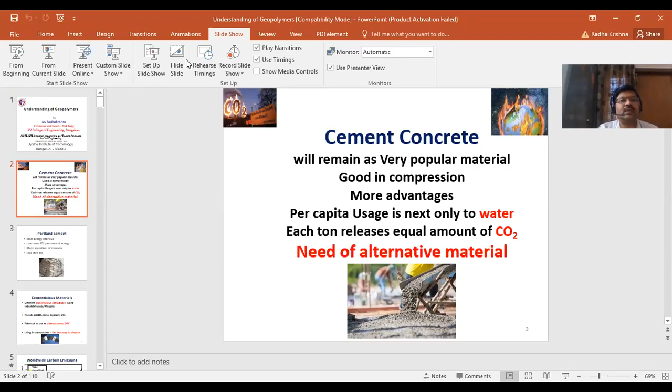I could not hear. Hello? Hello? Hello, Keshava? Can you hear me? Others, please. Hello? Yes sir, yes sir. Just a minute sir, yes sir, just a minute, okay, okay.

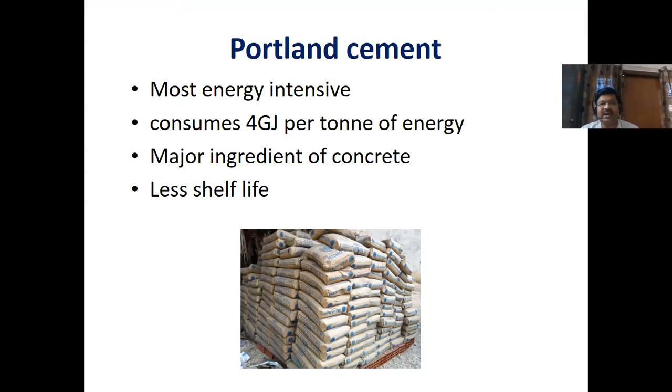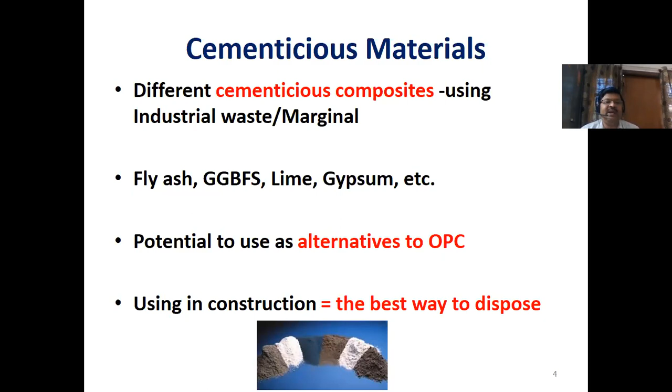Cement is a major ingredient of making concrete, and its shelf life is limited. There are other cementitious materials which may be industrial waste or marginal materials, such as fly ash, GGBS, lime, gypsum, etc. All these materials have the potential to serve as alternatives to ordinary Portland cement. So instead of disposing them in open land, using them in construction is the best way to dispose and utilize them.

Now let us go back to carbon credits. The graph shows data from 1750 to 2005 - recent statistics I don't have, sorry for that. This shows carbon emission for gaseous fuels, this is by solid fuels, and this is by liquid fuel. If you see this, after 1950 there is a huge jump in the consumption or carbon liberation in the world. Of course, if you put it all together, this is the total.

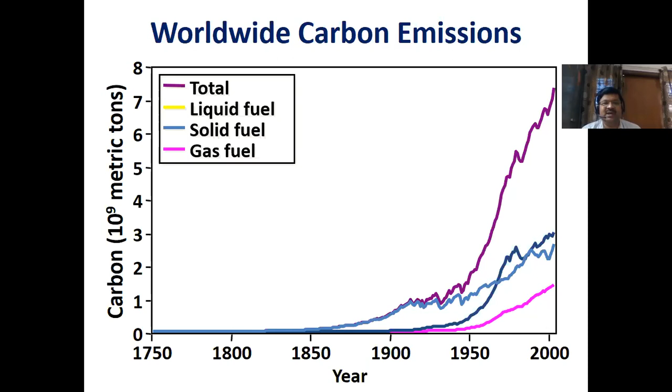So talks are going on among the leaders of this world to reduce carbon emission at least to the level of 1990. Our Prime Minister also has signed for this. So the responsibility lies on us and the future generation to reduce carbon emission.

So how is it possible? It is possible by conserving energy, by reducing energy needs, recycling energy, and we can go for alternate energy sources like nuclear, wind, geothermal, hydroelectric, solar, and fusion. All these things will not have any carbon emission. Wherever it is possible, let us make use of all these things so that we can reduce the carbon emission.

Now the next question is how it is possible in the construction industry. So it is possible only by reducing OPC.

If you think of OPC - on the y-axis is the replacement level of fly ash, I will tell you what fly ash is later. On the x-axis, OPC itself is there, blended cement is there, high volume fly ash concrete is there, FaL-G and geopolymer. OPC cannot have any fly ash, so it will be 0. Blended cement may have around 30, maybe these figures are approximate. And in case of high volume fly ash concrete, we can go up to 55, even 60.

This was developed by CANMET, Indian origin scientists at CANMET Canada. They developed a new concrete called high volume fly ash concrete in the 1980s, wherein a minimum of 50% of cement can be replaced by fly ash. This is called high volume fly ash concrete.

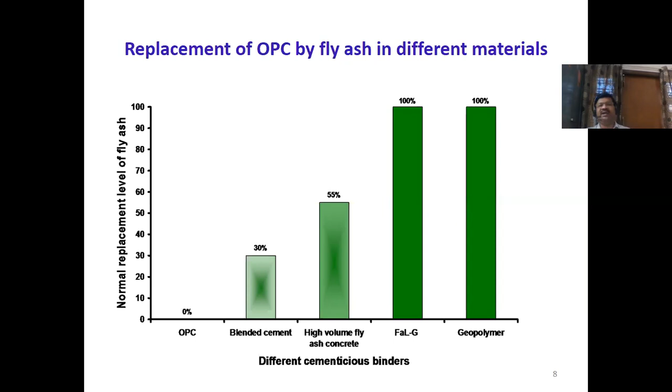So we can manufacture cement concrete, cement mortar, or cementitious grout without using OPC, but by using fly ash or any other material. That's why that indicates the greenest material.

Now let us know what is meant by geopolymer. It is the activation of natural materials like clay - I'll tell you in the next slides. Clay is a naturally available material, so that's called geo, meaning earth. And polymer is the repetition of the same polymerization. So the word geopolymer exists due to this, and it has a low carbon footprint.

And it's having low carbon footprint. We must know geo is the earth and polymer is the repetition of the same sequence of chemical reaction. Here, since we use clay to begin with, it is called geopolymer. Nowadays, recent investigation or research says we can use many materials, not only the Earth's crust - what is available, what clay that is available in the Earth's crust.

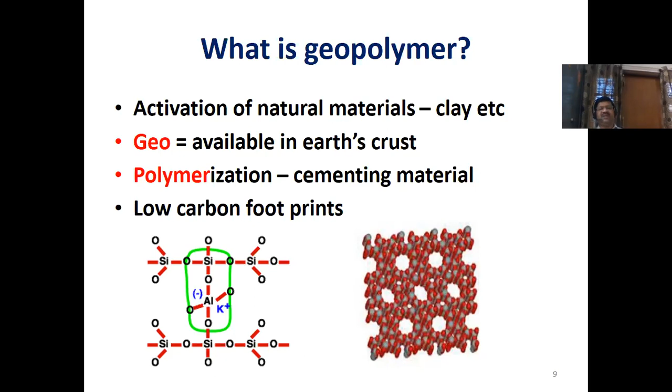Now, geopolymer is a misnomer, but we can use it as alkali activated cement, of course. The person responsible for this technology, Joseph Davidovits, is a French scientist. I met him in 2010 when he came to India. He postulated a theory on pyramids, saying the pyramids were formed in Egypt 4,500 years ago. People say it's controversial, but still let us take some points from him.

According to him, in the book about the pyramids, he clearly explains how pyramids are formed - they are not natural, they are man-made material, man-made structures. The Nile River in Egypt - there the pH was high.

That means it was alkaline, and the clay or soil available there is rich in silica and alumina. So people used to mix the high alkaline water with material rich in silica and alumina, and expose it to sunlight. So they made geopolymer - that's what he says. Of course there are challenges to his theory, but it's still worthwhile reading.

So this is how the concept of geopolymer came about. It's not new, it's a very old concept. Let us know what is coal ash. I am curtailing the discussion on that because it is understanding only at surface level - I'm talking about geopolymer. At the end of my talk, if you have any questions, you are welcome to ask.

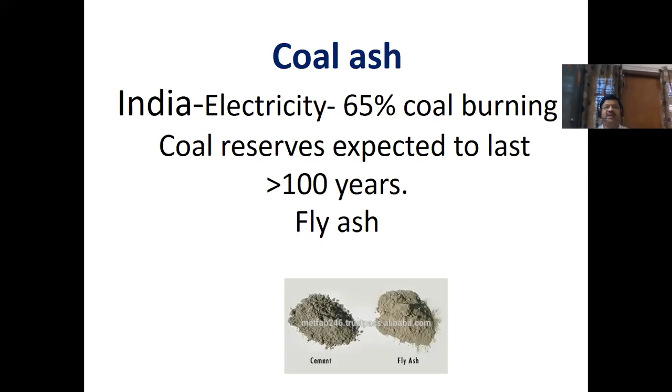All of us know that. Now let us see the classification of fly ash as per ASTM. If the calcium content is less than 5%, we call it Class F fly ash. Normally, Class F fly ash is produced by burning anthracite coal, and it is not self-cementitious. Of course it is very common across the world - 90-95% of the ash produced on this earth, from burning of anthracite coal, belongs to Class F fly ash.

There is another fly ash which is very important, Class C fly ash. The calcium content of Class C fly ash will be more than 20%. It is obtained by burning lignite coal - very, very expensive coal - and it is self-cementitious. It's very rare, and it has a lot of commercial value. Only in Neyveli, Tamil Nadu in India, it's available, and it has very high commercial value. So that's why normally people don't do research on Class C because it's very expensive.

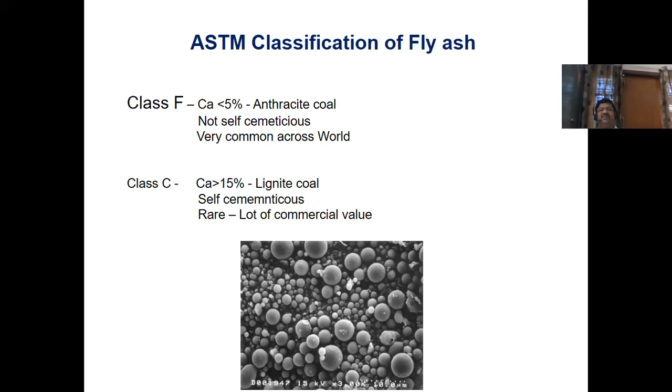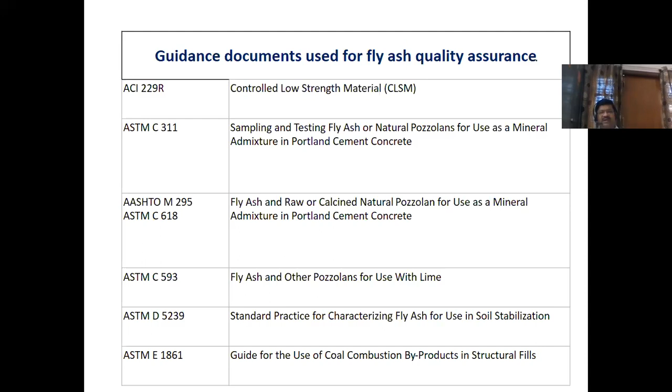We go for Class F. So in my discussion, if nothing is mentioned, it is from Class F fly ash only, which is very commonly available across the world. These are the various codes used for the utilization of fly ash for making different products, say CLSM and all - not necessary to go through in detail.

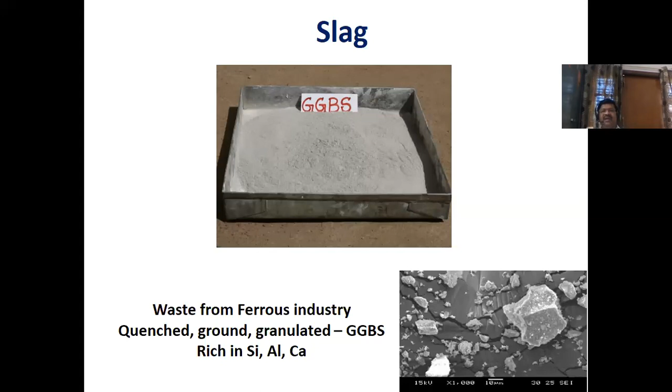Let us know about slag - what I mentioned is GGBS. It is waste from the ferrous industry. That waste obtained from the ferrous industry is quenched, ground, and granulated. The result is called GGBS, ground granulated blast furnace slag. This slag is also rich in silica and alumina, and of course in calcium also. This is the major difference between fly ash and slag: in case of Class F fly ash, calcium will be less than 5%, while in case of slag, calcium will be a little higher.

What is metakaolin? This is another material. It is obtained by burning clay at very high temperature. What is called kaolin is a clay - if you burn that kaolin, it's called metakaolin. It's very highly reactive, and of course it contains a high amount of silica. It also has potential to replace cement, but it's not economical because we have to heat the clay. However, it has potential to make geopolymer - I will tell you about that.

Next comes silica fume. It contains more than 90% silica. Of course, without silica fume, we cannot make high strength concrete - we need to add at least 5% silica fume. I'll discuss this in a different way, as an ingredient for making geopolymer. It is finer than fly ash.

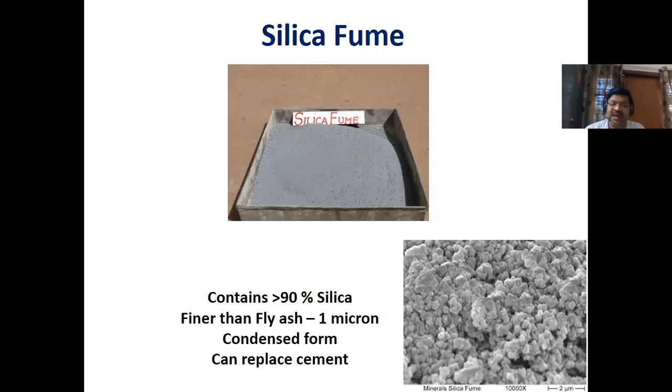Remember, cement has a coarse particle size. Fly ash has finer particles, and silica fume is finer still, around 1 micron. It's available in condensed form and has high potential to replace cement. If you see the properties of fly ash and GGBS at RV College of Engineering, we have used 4 types of fly ashes.

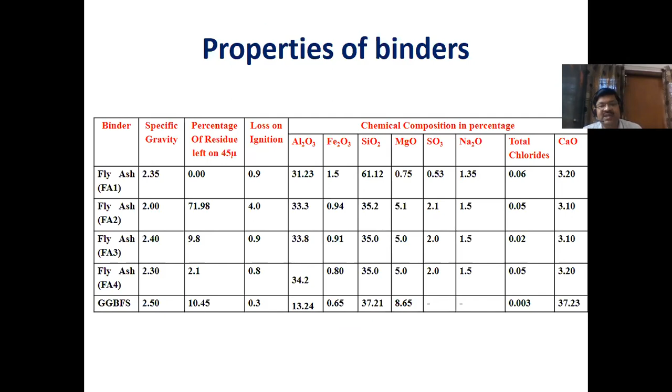And lastly we have GGBFS. The difference between fly ash and GGBS is mainly the calcium content. Here it's 37%, while all others are less than 5%. This is the major difference between GGBS and fly ash. That's why GGBS is lighter in color and fly ash is darker, because of the change in calcium composition. These are the ingredients of geopolymer.

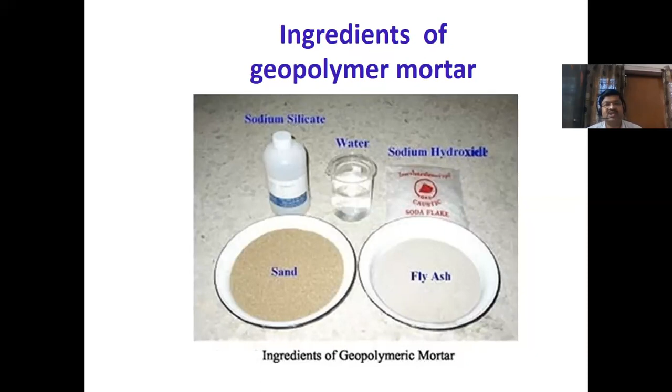So we use the same aggregate, whether fine or coarse. Instead of cement, we go for fly ash or any material rich in silica and alumina. We use the same water, but we also use two additional chemicals called sodium silicate and sodium hydroxide. Both are added to make the solution. This is activation, some chemistry. Alumina silicates are dissolved, then polymerization happens.

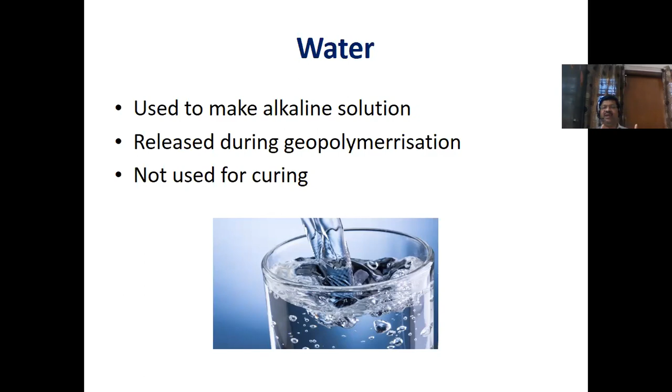This water is released during polymerization. So after adding alkaline solution to make geopolymer, water is released and no curing is required. This is the difference between geopolymer and normal concrete. We need to wet the surface of normal concrete to continue hydration or curing, but in geopolymer, water is released during geopolymerization, so there's no question of water curing.

How to make it? The process of making geopolymer is the same as cementitious composites. What is meant by cementitious composites? It may be cement paste, cement mortar, or cement concrete. Whatever process we use for making these three, the same process is used for making geopolymer, but there is a change in ingredients - instead of cement, we go for aluminosilicates.

What do you mean by aluminosilicates? You can see fly ash, GGBS, silica fume, metakaolin - these are all aluminosilicates because they are rich in silica and alumina. If you see the chemical composition of these typical binders, they are rich in silica and alumina. That's why they are called aluminosilicates. We use them instead of cement.

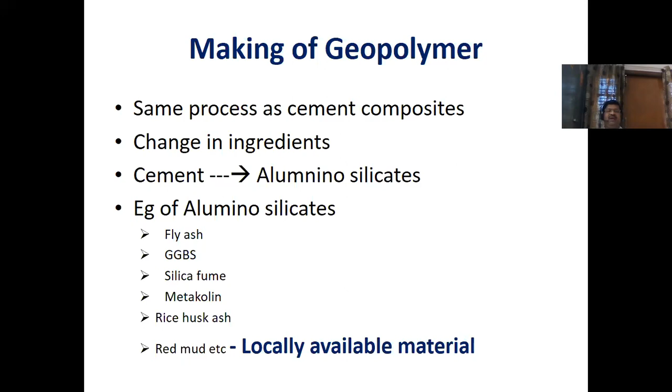I strongly propagate using locally available materials which are rich in silica and alumina. This differs from area to area. For example, red mud is available in various parts of the world. If you use red mud, it's okay as long as it contains silica and alumina. So I request all researchers to use locally available materials rich in silica as base materials for making geopolymer.

Now, aggregate is the same, only the binder is different. So water is converted into alkaline solution by adding sodium hydroxide and sodium silicate, typically at 8 to 14 molar concentration - I'll explain this in the next slide. We use either sodium hydroxide and sodium silicate or potassium hydroxide and potassium silicate.

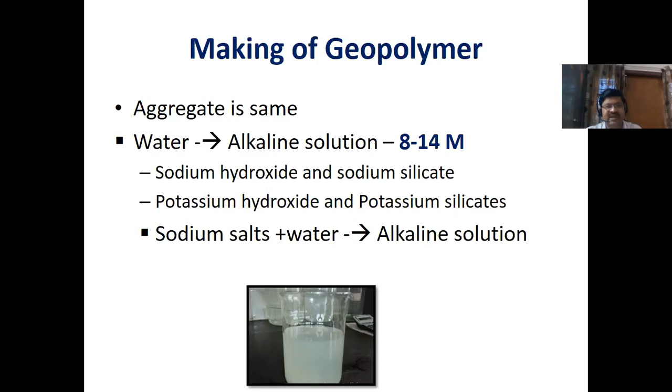We have two choices, but potassium hydroxide and potassium silicates are more expensive compared to sodium. That's why people go for sodium hydroxide and sodium silicates. The sodium salts are dissolved in water to make the alkaline solution - you can see the white liquid in the container. So now, what is the process?

This is a schematic representation. Sodium hydroxide and sodium silicate are mixed in water, then fly ash is added, aggregates are added, and we make concrete. This concrete can be used for making slabs, beams, cubes, cylinders, etc. This is the process of making it, shown in the schematic representation.

Now, how is strength developed in geopolymer? All engineers are waiting for this. In the case of class F fly ash, geopolymerization happens, but not at room temperature. This geopolymerization is possible only at elevated temperature, normally at 60 degrees Celsius. Please refer to the material published by Professor B.V. Rangan of Curtin University, Australia.

He graduated from the Indian Institute of Science, Bangalore, and settled in Australia, Curtin. There, he has written 3 volumes on geopolymer, beautifully explaining how geopolymer can be prepared using class F fly ash at elevated temperature.

All 3 big volumes are available online, free of cost, anytime: GC1, GC2, GC3. There he clearly explains.

That's why if you add only fly ash, there will be geopolymerization, but you have to cure it at a higher temperature. But if you add GGBS, the strength development is not only by geopolymerization, it is also by hydration. So thermal curing may not be required.

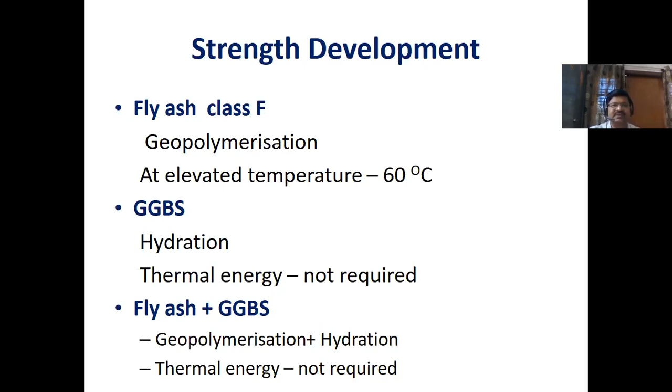Next, I mentioned 8 to 14 molar in the previous slides. I want to discuss what molarity is. Molarity is nothing but the concentration of alkaline solution. The molecular weight of sodium hydroxide is 40 grams per mole, so if you take 1 liter of water and dissolve 40 grams of sodium hydroxide, it constitutes 1 molar.

Because of molecular weight, to make a 12 molar solution, we multiply 40 by 12, getting 480 grams, and add that to 1 liter of water to make a 12 molar solution. Various researchers say they start from 6 and stop at 14 molar.

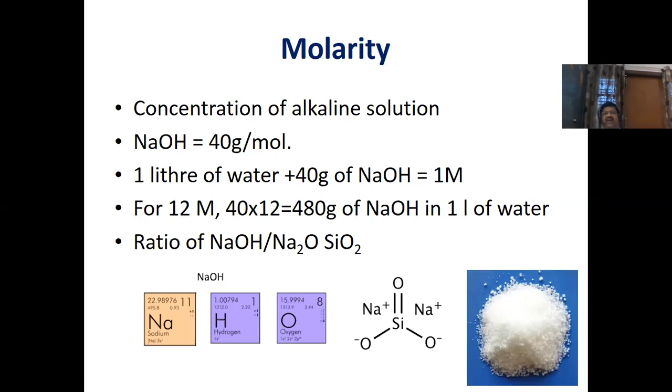The ratio of sodium hydroxide and sodium silicate also matters. Only sodium hydroxide may not be effective, so people are fond of adding sodium silicate also for early reaction. So this is all about molarity.

Next, if you take tap water and add sodium hydroxide and sodium silicate, that becomes alkaline solution, as shown in the picture. Remember, this produces heat up to 80 degrees Celsius. This is very important, so those venturing into making alkaline solution must be careful. It will be boiling at 80 degrees Celsius, and you have to stir it to cool it.

You can use the solution only after 24 hours. This is the convention, because it will be very hot in the fresh condition.

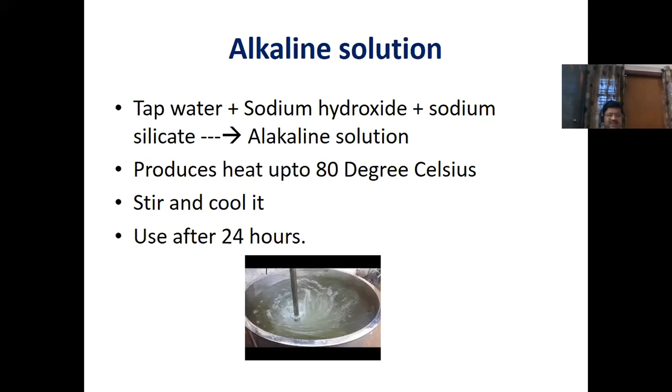Next, we have to take some precautions. Unfortunately, I repeat, it is very unfortunate that researchers and publications, all the good literature about geopolymer, nobody reports about the precautions. Since I have worked in the laboratory myself, I have formulated these after consulting a team of doctors. This alkaline solution is highly alkaline and very hot in the early hours, so these two points are very important.

We should not touch it with bare hands. We have to use protective measures. By chance, if you touch it or it falls on your skin, you lose the skin in minutes. It takes a very long time to heal, but nothing to worry about.

If it falls on your hand or anywhere on the skin, immediately splash a jet of water, pouring it continuously on the affected area. It will stop, and within minutes you will become alright. But if you leave it as it is for more than 1 hour, you lose your skin. If some problem persists, you have to go to a doctor.

Unfortunately, as I told you, many researchers don't cite this information. We can use sodium hydroxide, sodium silicate, and mix with fly ash to make the alkaline solution, then mix with fresh concrete, and then go for beams and so on.

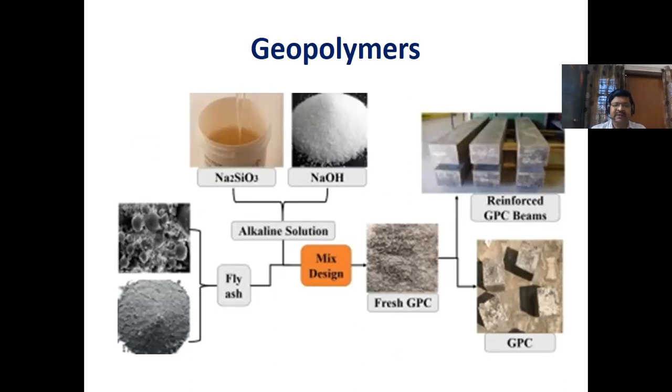Next, what is the water cement ratio in this research? I call water as fluid, meaning I don't use any water here, so instead of water, fluid is being used. Instead of cement, I'm going to use binder, because it may be fly ash, GGBS, rice husk ash, silica fume, or metakaolin.

So instead of water, I'm using fluid, and instead of cement, I'm using binder. So instead of water cement ratio, I call it fluid to binder ratio. It's more meaningful, and it is the ratio by weight.

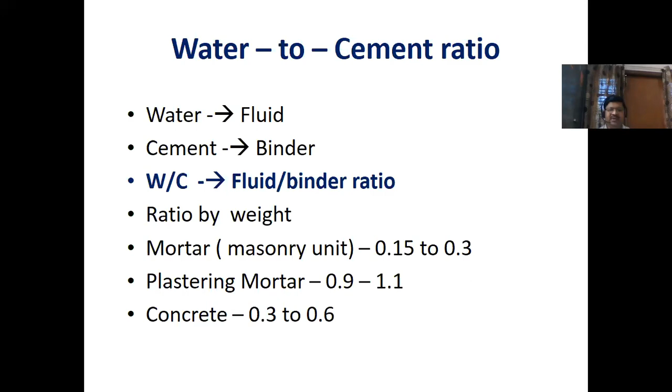We can use mortar if the fluid binder ratio is 0.15 to 0.3, or 0.9 to 1.1 for plastering, and concrete if it is 0.3 to 0.6. So depending on the fluid binder ratio, we can use the material, or go for different water cement ratios for making different materials.

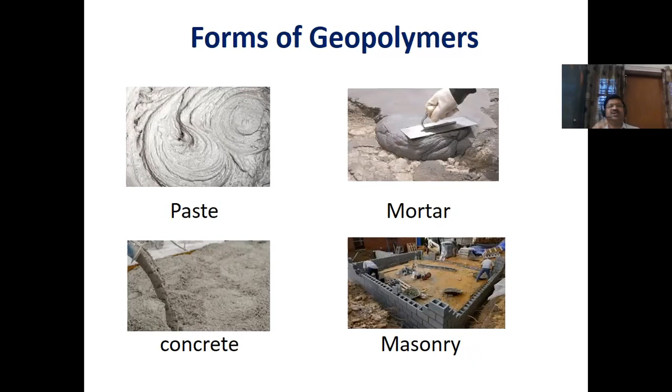Next, what are the different forms of geopolymer so far? We can use paste, which means only binder and alkaline solution. If you add some amount of fine aggregate, it becomes mortar. If you add coarse aggregate, it becomes concrete. And if the mortar itself is very harsh, it can be used for making masonry. So we can use geopolymer paste, geopolymer mortar, geopolymer concrete, and geopolymer masonry blocks. What is the paste?

We add binder, there is fly ash and GGBS, and alkaline solution. That's all. Now the results come. We have used 11 samples, GP1, GP2, etc. till GP11, wherein the fly ash-GGBS combination is varied from 100:0, 90:10, etc. till 0:100. That means in the first case, fly ash is 100%, GGBS is 0. Second one, fly ash is 90. I'm slowly increasing the GGBS when compared to fly ash.

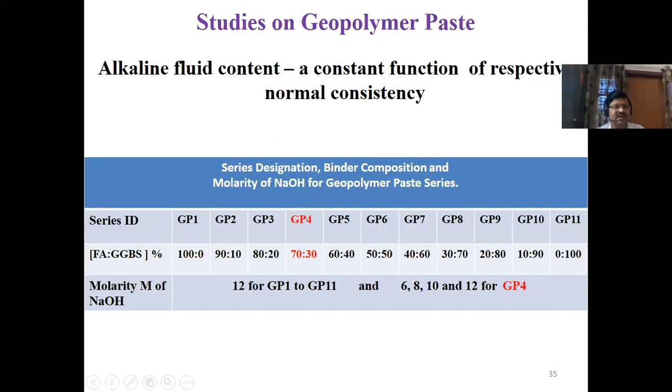We have made some correlation between strength and microstructure, at 1 day, 3 days, 7 days, 14 days, and 28 days. So strength at 1 day is 2.9 MPa. Next, 3 days it is 3.3 MPa. 7 days it is 6.4 MPa, 14 days it is 14.2 MPa, and 28 days is around 20 MPa.

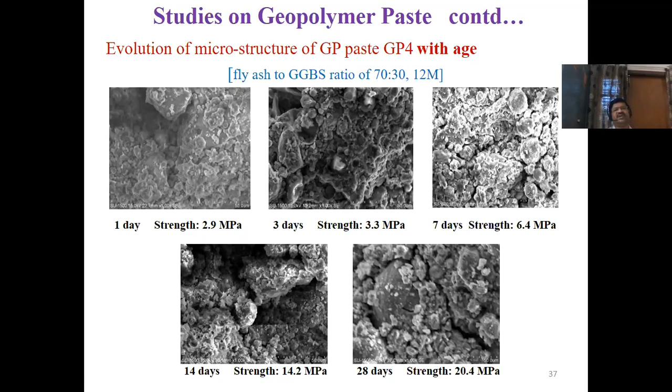Apart from strength with age, we also captured the microstructure of the geopolymer. If you see these 5 microstructures, there is refinement of microstructure, which gives confidence of developing the strength.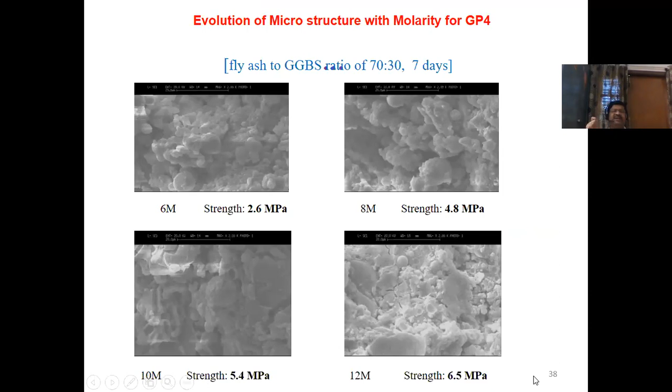If you see the molarity, it is 6 molar, 8 molar, 10 molar, and 12 molar. That means this is the amount of sodium salts added to a particular solution, called molarity. For 6 molar, it is 2.6. For 8 molar, it is 4.8. For 10 molar, it is 5.4. And for 12 molar, it is 6.5. That means there is a steady increase in strength with the molarity, at the given age.

Next, what are the findings of the paste phase? Really, the strength of geopolymer paste is more than OPC. Setting characteristics depend on many factors like water-cement ratio, amount of GGBS, climatic conditions, etc. And this can be strongly recommended to be used in the form of grout without curing, so if required, the cracks can be filled.

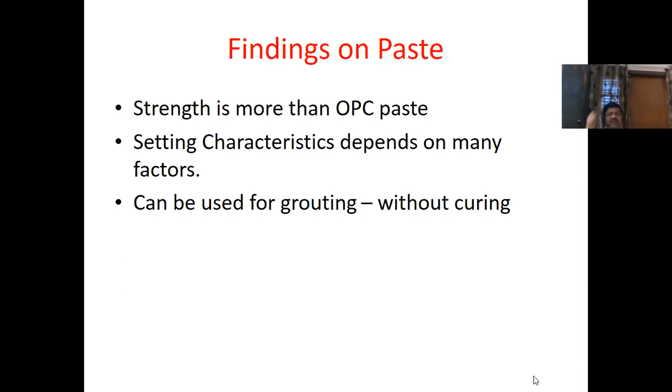That's about the paste. Now, to the same paste, if you add fine aggregate, it becomes geopolymer mortar. It looks like cement mortar only because the color is the same. These are the samples which we tested. So this is the mortar preparation 1:2, this is 1:1.5, with 100 fly ash, 0 GGBS, 90-10, etc. Earlier what I showed was paste, now it is mortar, since we have added fine aggregate.

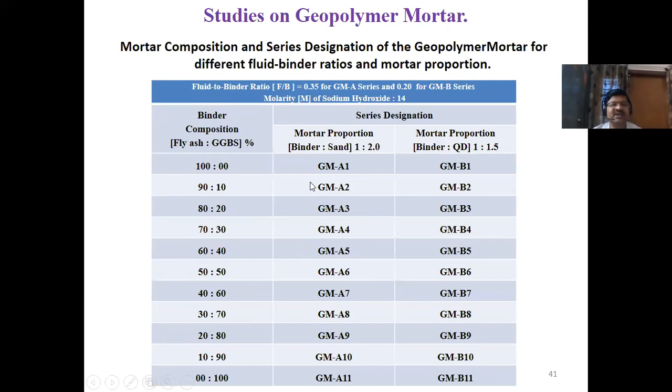Next, this is the graph showing the increase in strength with age, with the fly ash and GGBS content at a given age. Average compressive strength: as the GGBS content increases, strength increases, and then comes down. That means at this point there will be maximum strength. So in case of geopolymers, if you want maximum strength, the GGBS content should be around 20 to 30%.

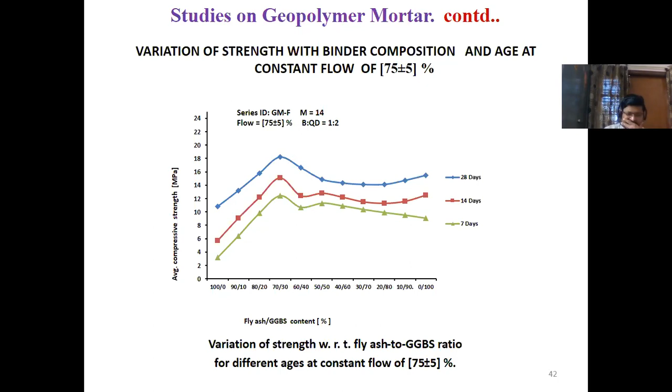This is proved long back, and we verified it in the laboratories. Next, the variation of compressive strength with molarity of sodium hydroxide: this is average strength, and this is the molarity.

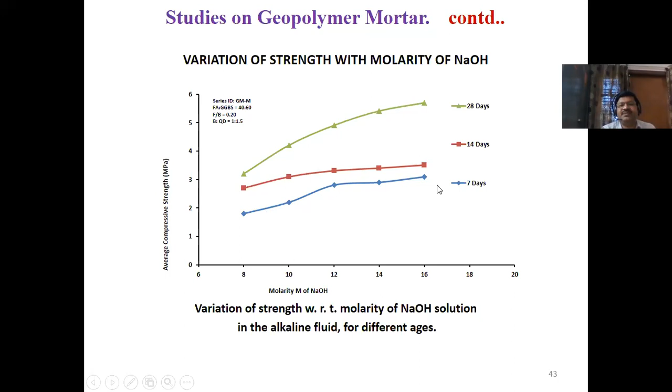This is the strength development with age - 7 days, 14 days, and 28 days - for 8 molar, 10 molar, 12 molar, 14 molar, and 16 molar. So this is with respect to age, meaning there is increase in strength with increase in age, and also with increase in molarity.

If the water cement ratio is less than 0.3, it is partially saturated because there will be air. That's why it's called a three-phase system, and it can be used as mortar. We don't use any coarse aggregate, only fine aggregate, and they are suitable for making blocks, and it requires compaction.

On the other hand, fully saturated means the water cement ratio is more than 0.3. There will be no air here, only solid and liquid, and concrete will be there, and it is suitable for making structural material - more than 20 MPa.

So this partially saturated mortar can be used for making bricks and blocks. This fully saturated can be used for making concrete. Even in case of cement, it's the same - just a little change in the water cement ratio.

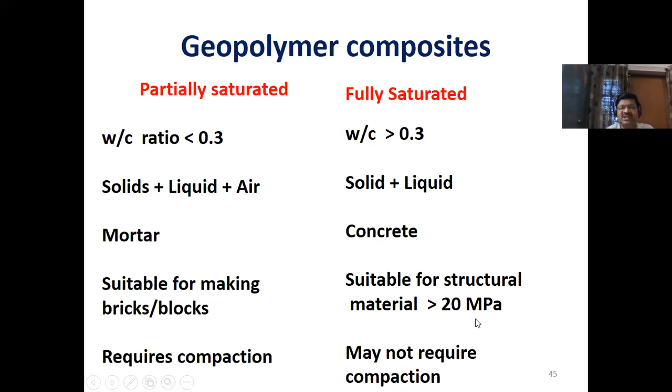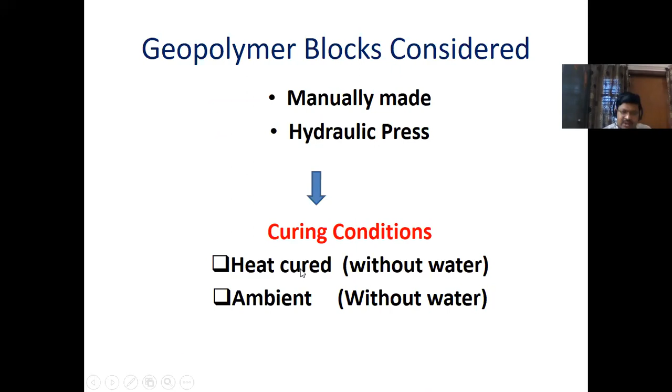So we have used geopolymer blocks. We have done both blocks and concrete. In case of geopolymer blocks, it can be either manufactured manually or with hydraulic press. Some were heat cured, some were ambient cured without water - of course both without water.

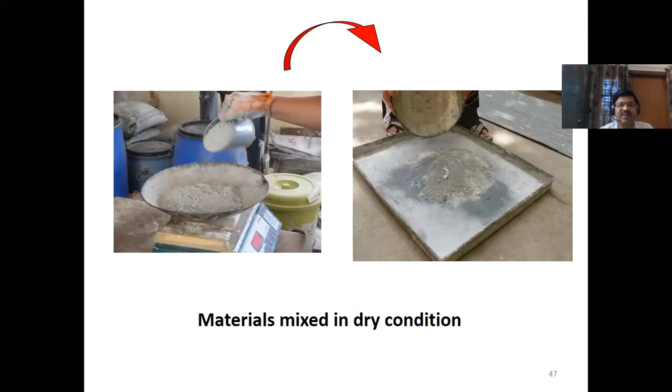So these are the pictures of mixing. We weigh the material, mix it like cement and sand, and add alkaline solution and mix it. This is a high harsh mix, and this is the mortar, and this is how we compact.

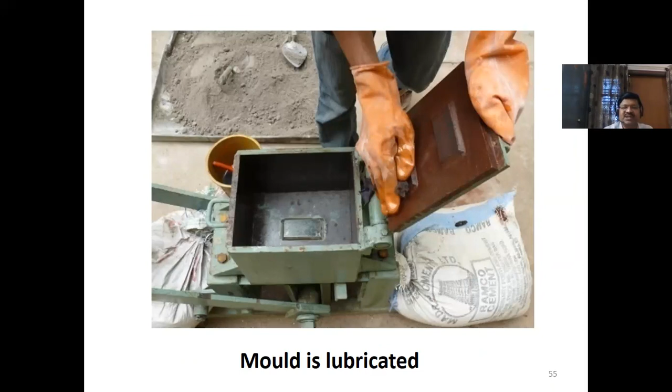This machine was developed at IISc by Professor K. S. Jagadish and his team, and we can easily make blocks without any electricity. See here, we can add the material, press it, and eject it like this. So this is the ready-made block - compressed block or masonry block.

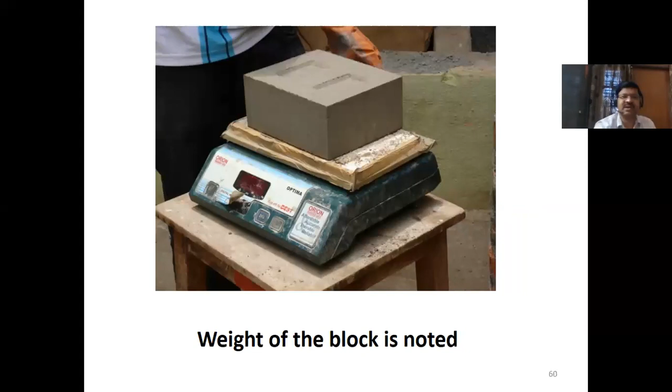You can mark it and see that we have kept it for curing, and of course there will be air here - it's a three-phase system.

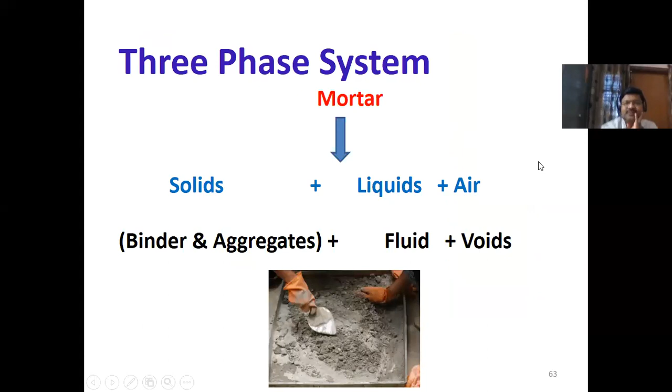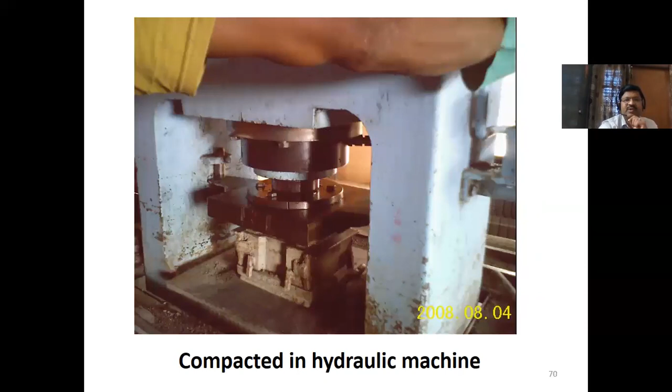So we can test and check the crack, and we can make such blocks using static vibrocompaction too. See here, we have used a different mold, poured the material, and done vibrocompaction - you can see many paver blocks.

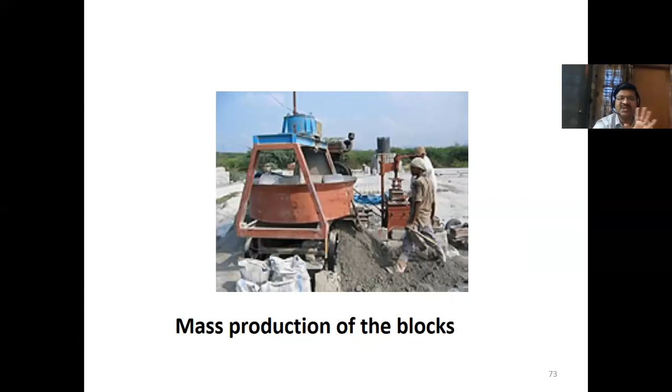So we can use this for mass production also. That means whatever process and equipment is used for the cement industry can be used by geopolymer as well, just by changing the ingredients. See here.

For the purpose of research, we have prepared different sizes and shapes of blocks just for recording purposes. We call these paver blocks, and these we call compressed blocks. See here, these are the sizes.

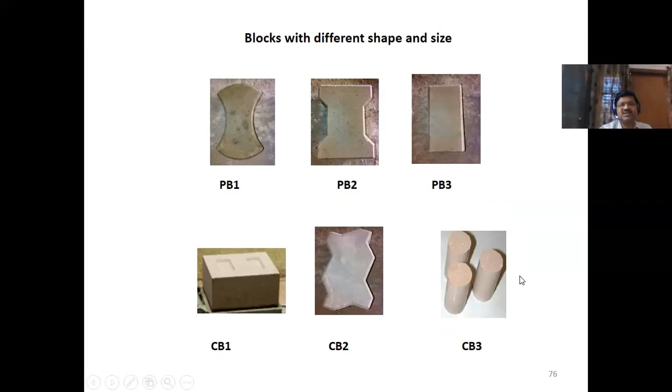In case of ambient cured blocks, ambient cured means no water curing, no thermal curing, no thermal input, no traditional curing, no demolding - only compress and keep it steady. So it's very fast in development.

So now let us know about heat cured geopolymer blocks. I told you that the geopolymer research done by Curtin and his team, B.V. Rangan and team at Curtin University, reported only about heat cured geopolymer. So we have just done some experiments on heat cured geopolymer because we used only fly ash.

So heat cured means it's at 60 degrees Celsius for 24 hours. Ambient cured means it's in open air.

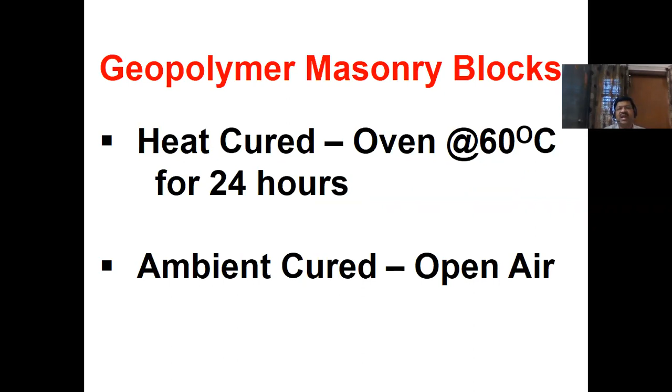Here, less than 0.15, we could not make mortar at all because it is not possible. And beyond 0.225, we cannot add or compress because it becomes saturated. That's why this is in the range of 0.15 to 0.225, though sometimes it will go up to 0.3.

So here the Abrams' law is being followed, which was facilitated by Abrams in 1918 for cement concrete. It applies to geopolymers also.

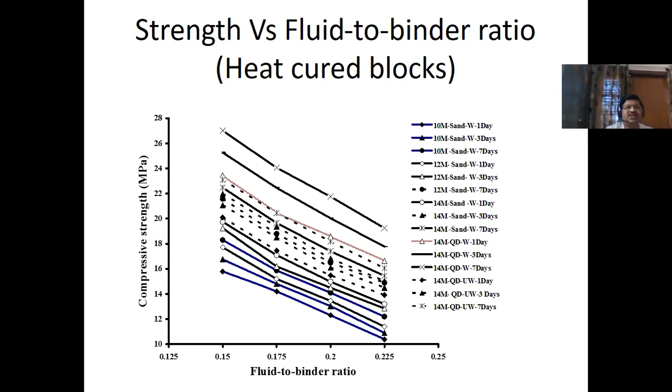Next, ambient cured. So we have used 9 parameters for ambient cured geopolymers: age from 1 to 180 days, 4 types of fly ash, 2 types of alkaline activators, and ratio of binder to aggregate at 1:1, 1:2, 1:3.

Degree of saturation is 40 to 60%. Molarity of alkaline solution is 8 to 14. Fine aggregate used was sand, quarry dust, pond ash, etc. Temperature was 25 to 80 degrees Celsius. And we have used various binders like fly ash, GGBFS, silica fume, metakaolin.

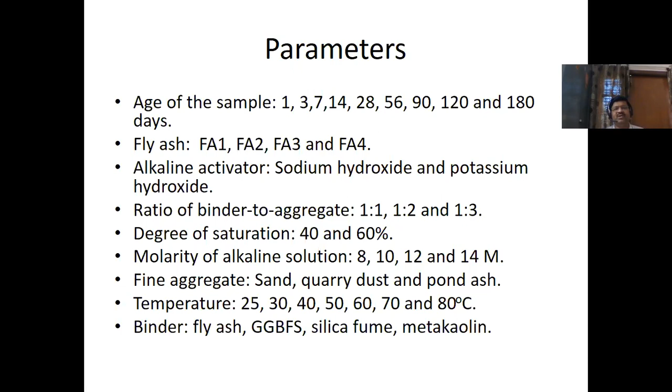Now, if you see the strength development here, this is very interesting. This is the strength development of ambient cured blocks. The y-axis is compressive strength, and the x-axis is the age. So if you see here, there is steady, rapid increase in strength from 1 day to 7 days. After that, the slope reduces because the increase in strength is less. There is increase in strength, but the rate of increase reduces.

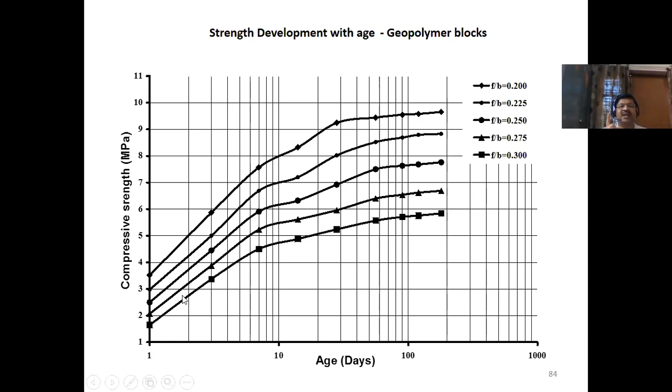We can say at the age of 1 day, it is possible to get 3.5 MPa. As per the code, if you want a brick of 3.5 MPa, that's enough. We normally get that in 3 to 4 months for fire clay bricks. In case of concrete, we may have to wait 10 or 15 days. But in case of geopolymer, we get the strength of 3.5 MPa at the first day itself. So it is very fast in curing. This is the advantage of geopolymer blocks.

And of course, we can develop strength of blocks up to 30 MPa. Rarely do we get burnt brick strength of 30 MPa, except in 2 places - one from Orissa and another from Andhra Pradesh, where the clay is very good. In the rest of the country, we will not get more than 5 to 10 MPa. So in geopolymer masonry blocks, we can get strength of the masonry block up to 30 MPa or more.

And stress-strain characteristics are almost the same as a masonry block. So we have normalized the curve, and we have tested 4 blocks. In all the cases, the strain is 0.0004, etc. And this is the compressive strength, and this is secant modulus, 17,000 something.

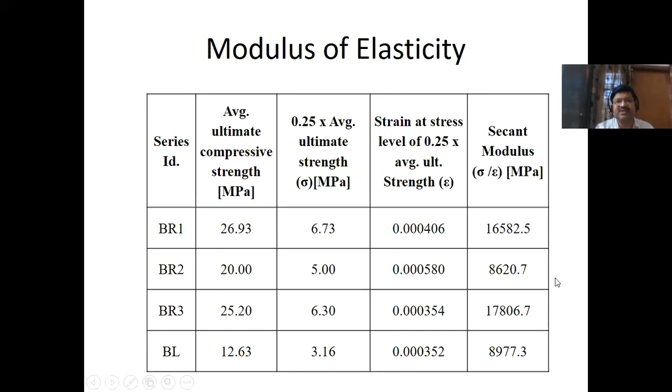Of course, we tested it at elevated temperature for 2 hours. We kept the blocks for 2 hours at 200 degrees Celsius, 2 hours at 400, 2 hours at 600, and 2 hours at 800 degrees Celsius. Even at 800 degrees Celsius, the average weight loss was just 8%. I want to stress that in case of burnt brick or concrete blocks, after 400 degrees it will disintegrate - it cannot exist. But geopolymer can sustain up to 800 degrees Celsius. We could not go beyond 800 because we don't have the equipment. So only 8% loss - we can conclude that geopolymer is highly resistant to temperature.

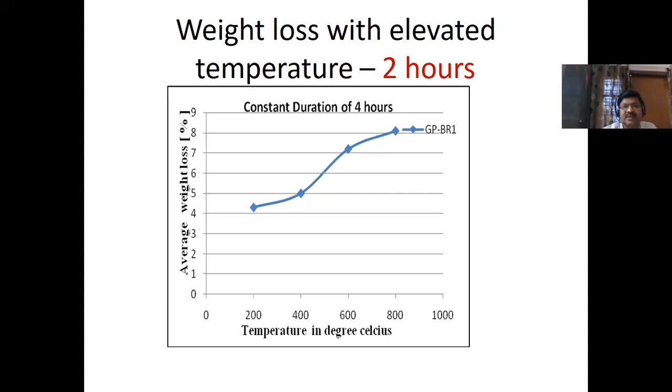Next, durability test - we used ASTM code. Water absorption is 2.4% and mass loss is just 2%. That means it's very durable.

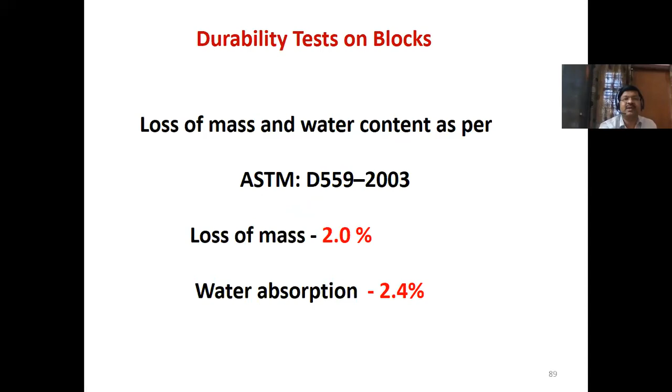Of course, after preparing or manufacturing the concrete blocks, we want to go for masonry. So for that, we have used bricks - ordinary bricks, solid blocks, and hollow blocks, 3 types. After testing them individually, we have tested the wallets also. After wallets, we construct the building also. So I'll explain in sequence - please give me attention for 10 to 24 minutes.

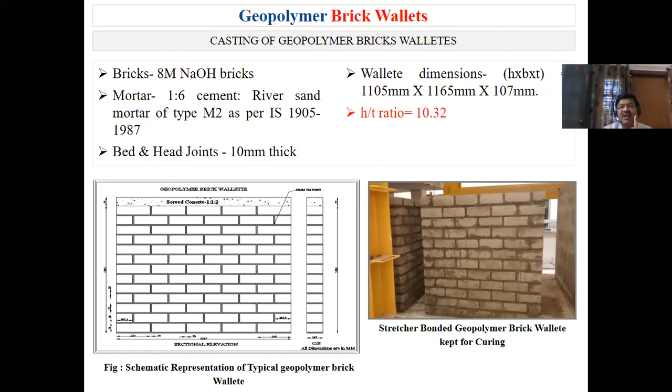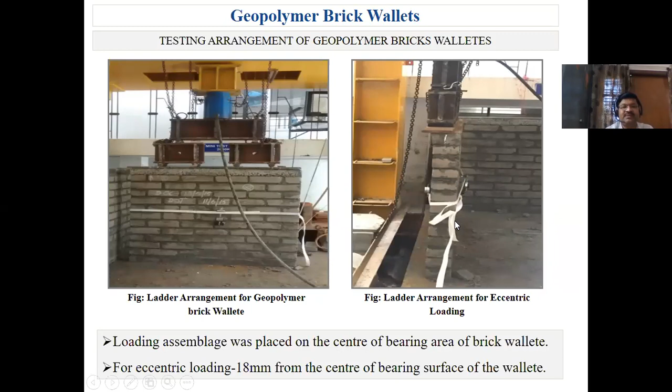At RV College of Engineering, we have facilities to test the wall up to 3 meters. We have the HUDCO Research Center with 3 loading frames, where we can test walls up to 3 or 4 meters height. These are the brick walls we constructed, and we applied the load like this. We used this DEMEC gauge to measure the modulus of elasticity of the wall - and this is for the solid block.

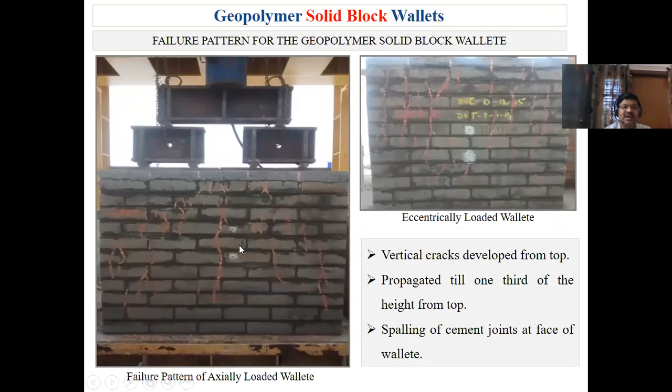So for all the walls, we have determined the axial load carrying capacity, eccentric load, compressive strength and modulus of elasticity, so that we can build confidence among the users who use this for making construction better.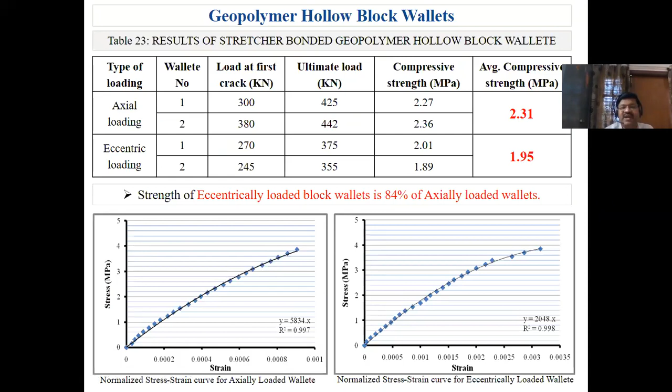In case of hollow blocks, the axial loading strength was 2.31, and this is for axial loading, this for eccentric loading. So you cannot get even 1 MPa in case of solid blocks, but in case of hollow blocks we are getting higher strength. This is the typical stress strain curve.

After that, we wanted to go for construction of a building. Luckily, we got the opportunity to construct a building, one among a hundred.

We constructed one typical building, and we could not plaster it - only painting - and kept it open without plastering, without roof, for 24 months, 2 seasons. And see what the result was.

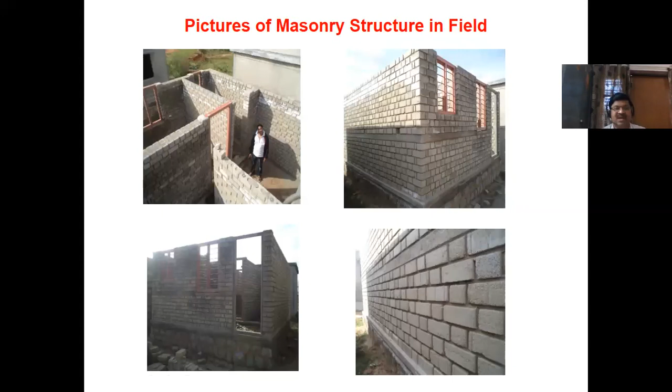See here, no change in dimension of the brick walls after 2 years. Brick edges sharp, no erosion, no pitting, very less water absorption, no distress, right? Even after 2 years, there was no sign of any deterioration of the geopolymer walls.

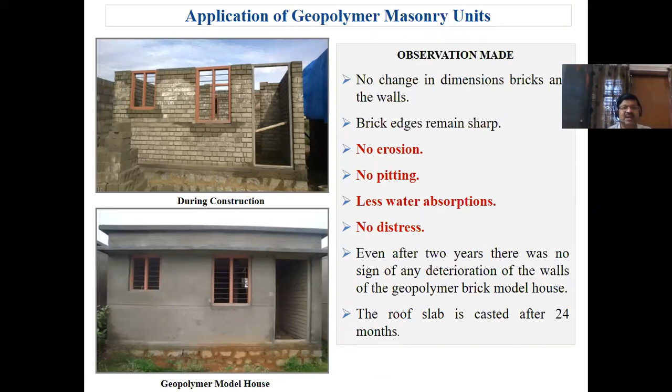The roof was cast after 24 months because we could not sustain the pressure from the government - it had to be delivered to the person who was allotted it. So finally we went for casting of the slab, having kept it open for 24 months.

In winter, it was a little warm inside, so the thermal comfort was very good compared to the concrete blocks. Now this concludes the part about the paste, mortar, and masonry blocks.

Finally, I'll quickly conclude in 4 or 5 minutes. This is geopolymer concrete. It consists of fly ash, GGBS, fine aggregate, coarse aggregate, and alkaline solution. The look is the same - it's almost like cement concrete only, but it is geopolymer concrete.

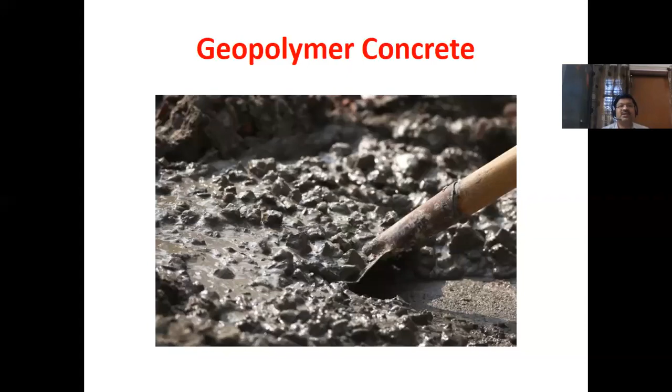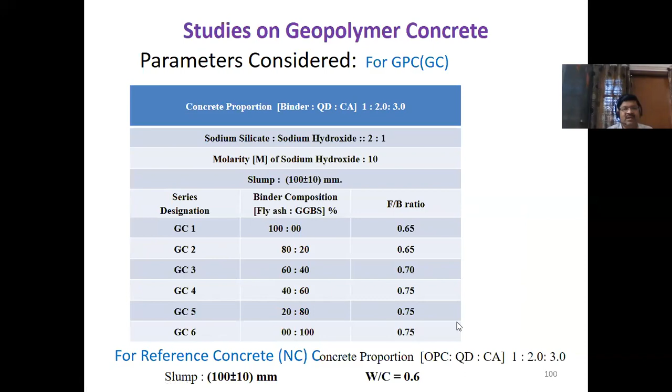This is how we used GC1, GC2 up to GC6, where we used 100% fly ash and 0% GGBS, 80% fly ash and 20% GGBS, etc. The fluid binder ratio was 0.65 and 0.75. We changed this because we kept the slump at 100 plus or minus 10 mm, which is why there is variation in the fly ash fluid binder ratio.

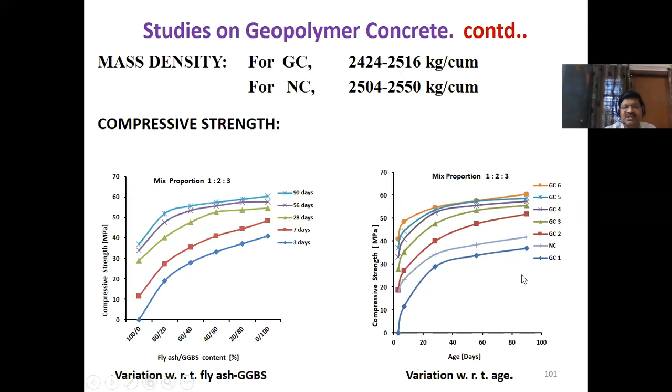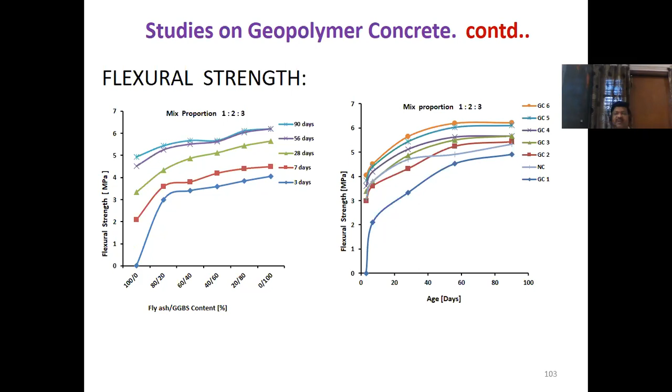We also conducted flexural strength using the beam - you can see here it's around 6 MPa. So the same trend observed in normal concrete appears in geopolymer concrete also. Next, shear strength.

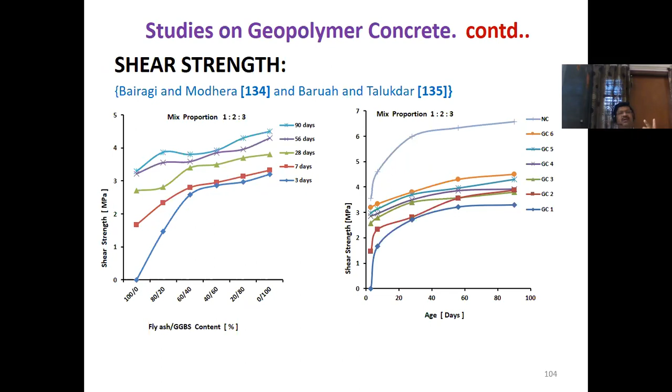This is also around 4 MPa - so compressive strength, split tensile strength, shear strength. Next, impact testing.

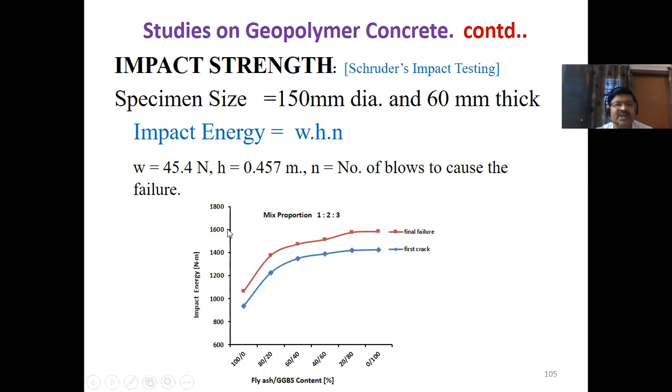We make a ball fall and see the number of blows that cause failure. The impact energy is around 1600 Newton meter, right? It's very high. Of course, pull-out test also.

Since it's a new material, we want to make sure the concrete has good bonding with the steel. If we are using it as RCC, we have to insert steel bars, so there should be good bonding between the steel and concrete. We checked the bond with the pull-out strength - it's a little more than or equal to normal concrete, so nowhere is it inferior to cement concrete.

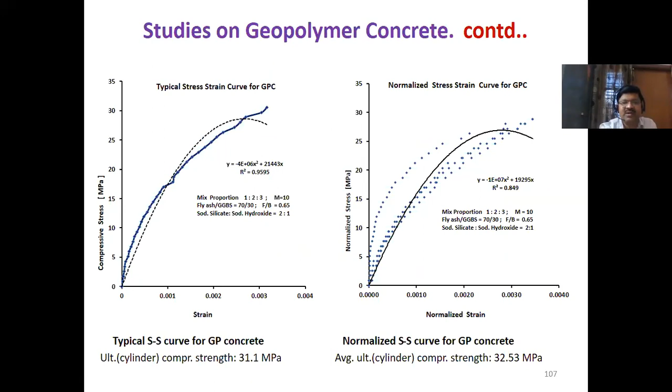This is the compressive strength typical stress strain curve, which is also the same. So to conclude, before concluding, I'll summarize - I told about the importance of concrete, the importance of reducing cement, and then various alternatives for making concrete.

To conclude, we can say geopolymers can be developed in line with Portland cement products. Remember, we need not have any new methods, only ingredient change. And it will have high compressive strength and durability, and we can use them for special applications like precast industry, fast grouting, high early strength masonry units, and lining of furnaces, because it will have very high resistance to thermal environment.

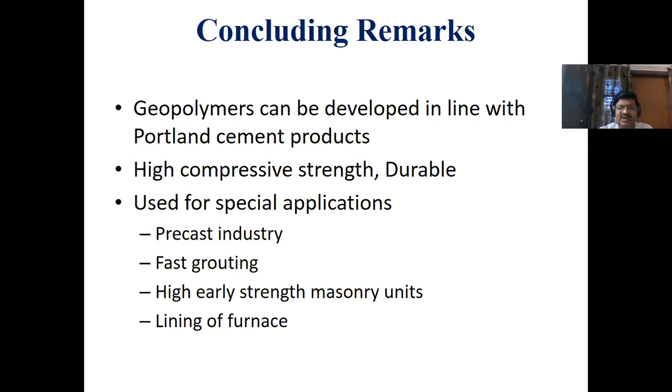In case of geopolymer concrete, it will have good slump, good compressive strength, split tensile strength, flexural strength, impact, and shear. So it is possible to make them without OPC, and without curing. That means just cast and keep it ready.